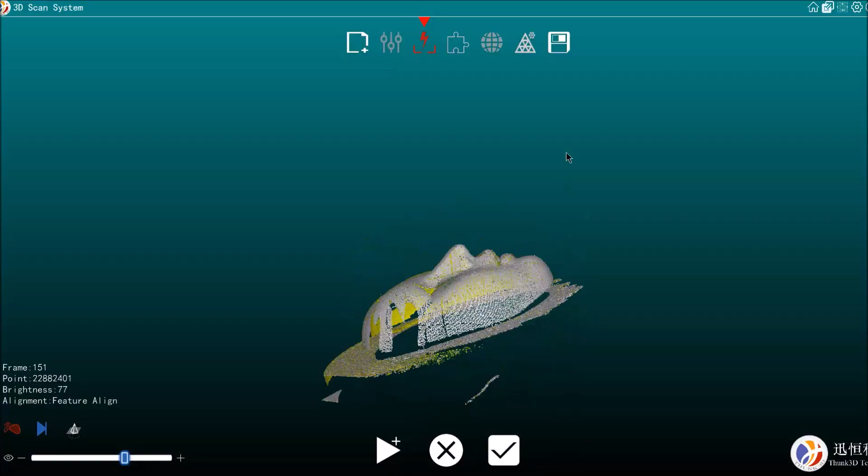The flashing light you see is the scanner, and those two red dots, you try and keep those red dots very close to each other. That's probably the focal length of the scanner. You can also see here I'm editing out some of the unwanted parts that were scanned.

The scanning process takes a while, takes a bit of practice. I've gone at it a couple times. You'll lose where you are and it'll all mess up. You just restart it and scan again.

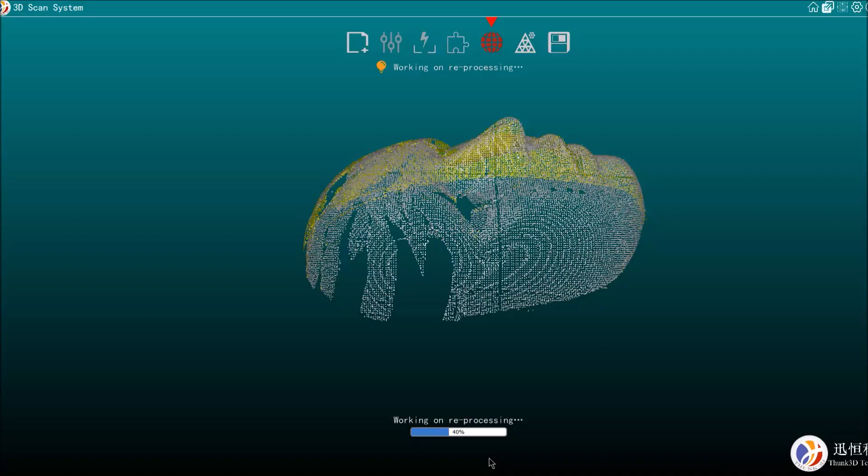Pretty well finished all the scanning. We'll let the program now compile all the data.

I've saved the file. I'm going to load that file now into a wrap program, and there I'll edit what I've scanned. I'll fill in some of the holes, rotate it around, make sure it's the best I can get.

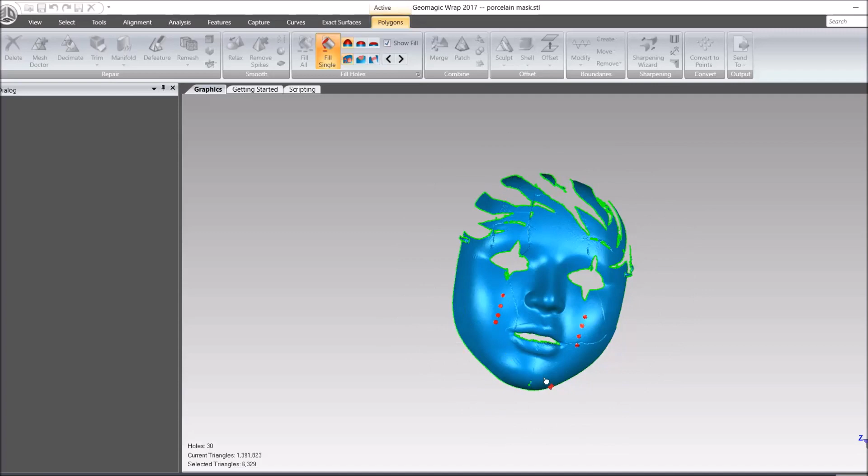But I want to keep this file as a mask, so I don't want to fill it all in, because you could select those holes and fill it in solid, like a head, like a bust. But I want to keep it open at the back, so I'm just going to fill in some of the small parts like her mouth and the tears. The rest of it I'll leave alone.

This wrap process demands a very high quality computer. I'm running a Core i9 and it's pretty good. If you use something slower, you'd be waiting on these files to get all crunched up.

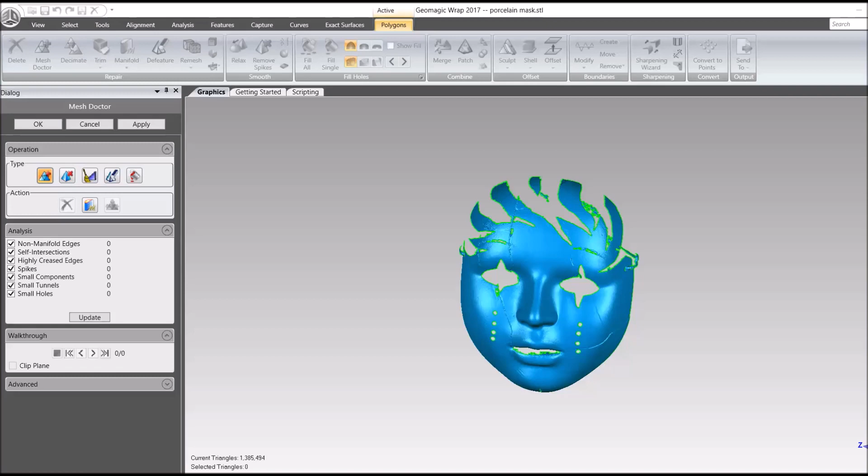Especially if you select it to fill in the whole mask, so it'd be a solid part, it would take a while to get that all filled in.

When I'm finished here, I'm going to save this file in an STL format. And that format is for 3D printing and also for CNC machining.

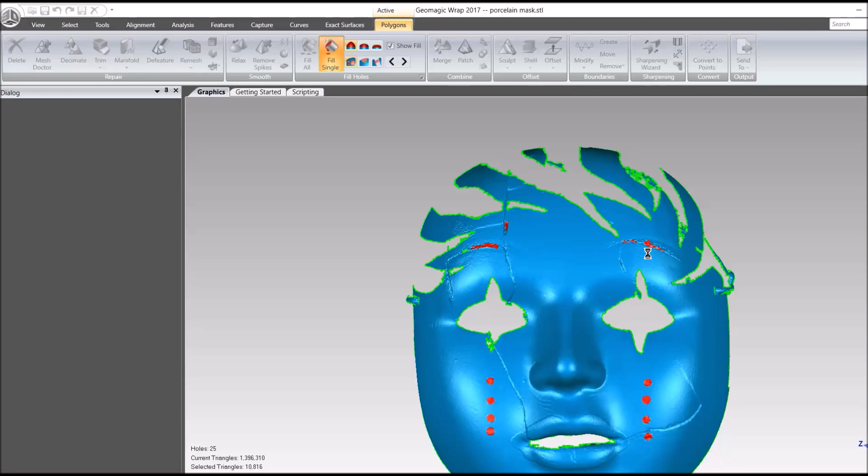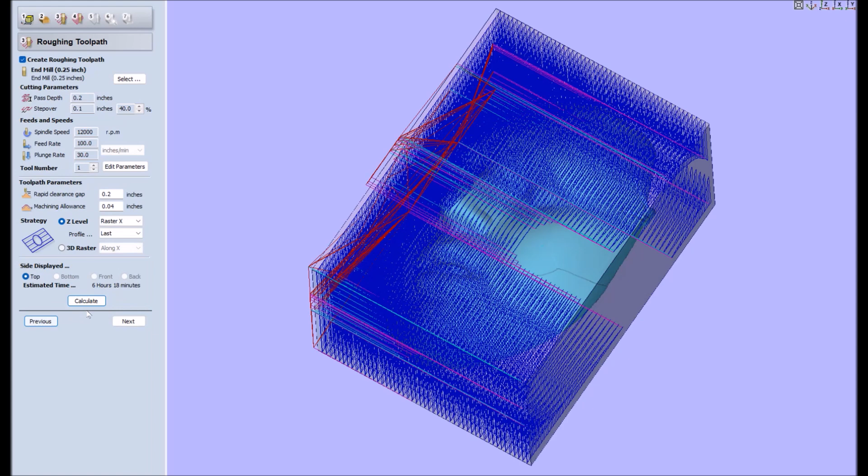Next, I've loaded the file into some software for the CNC to create a toolpath. It's just a simulation, just to have a look and see what it's going to look like. Also gives you an idea what the finished cut's going to look like.